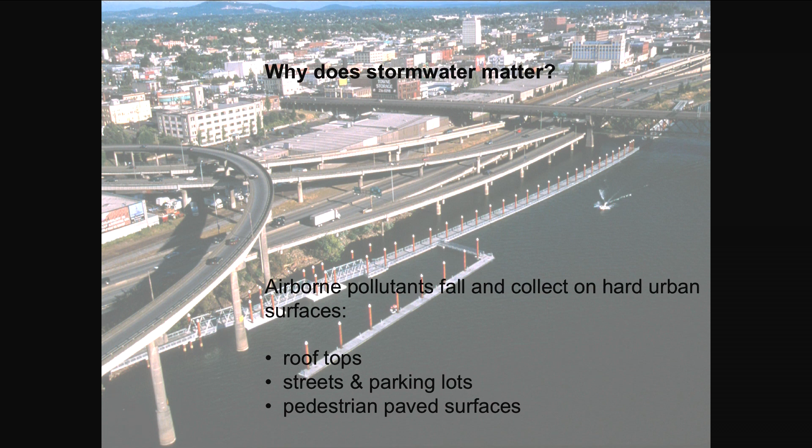One person mentioned that airborne pollutants that fall on surfaces, maybe roofs are cleaner than streets. That's definitely true, but I contend that airborne pollutants fall on all urban surfaces, rooftops, streets, parking lots, paved surfaces. And actually, a good example is look at your car. If you go away for 2 weeks, you washed it before you left, you come back, it hasn't rained, and it's covered with sticky stuff and things that have fallen out of the air.

Some places are more dirty than others from the air quality. You'll see from this example, this isn't the picture postcard for Portland, Oregon, but it is Portland. And freeways and all the rubber and all the airborne pollutants that come off fall onto rooftops in these urban areas. So we don't take those rooftops for granted. We feel like those need to be treated as well.

And I want you to just make a mental note. This is a project I'm going to show you a little bit later on, and you won't see the context of it next to the freeway in my photographs, but just remember that's what's there. So when I teach stormwater classes, I always remind everybody of the principal contaminants that we have, none of which are particularly pleasant to deal with. Some are in greater quantities than others.

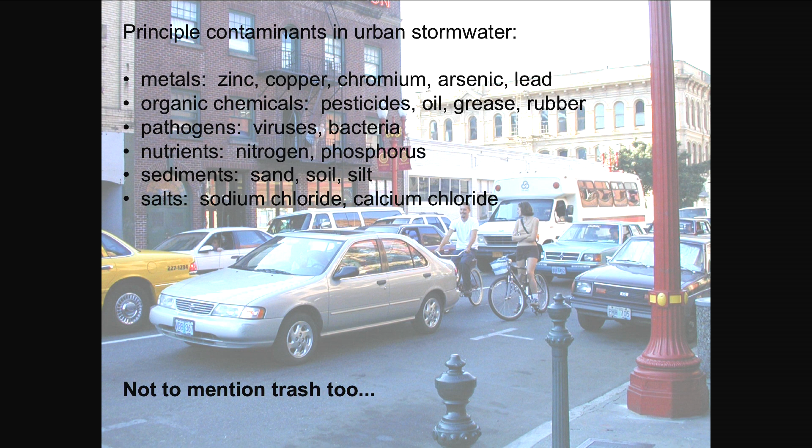And not to mention trash, too, because when I talk to students, I say, you'll never look at a catch basin in the same way after I'm done with you. You will never walk past one, and you'll see those pools of oil and the pretty colors, and you'll see the sediments, and you'll see all the junk that goes into our rivers, and most of it is untreated.

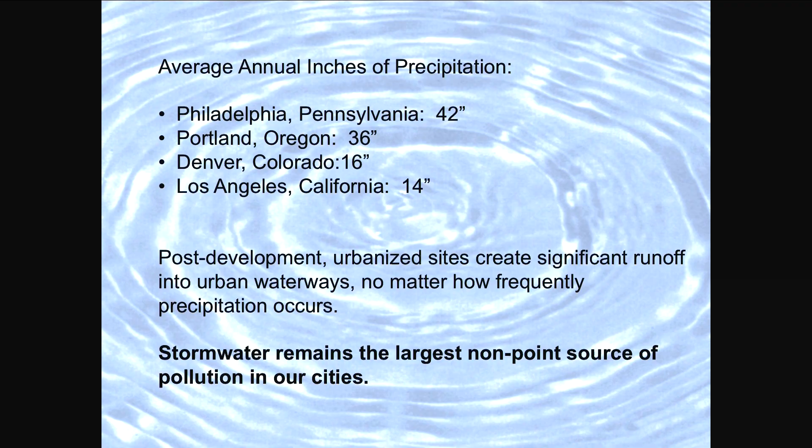And then coming from Portland, people always say, well, yeah, no wonder you have so much stormwater out there. You've got so much rain. Well, in fact, maybe we don't have as much rain as someone might think. Maybe Philadelphia has more. I got it off the internet, so it must be true. But we also know that Denver and Los Angeles have far less rain than Portland, but I say, are your streets any cleaner than ours? Yours just don't wash off as often. You're not as reminded of water as we are in Portland, Oregon.

So yeah, we were a little more proactive at getting there in terms of dealing with it. And we have endangered species of fish in our rivers. So we're taking this all very seriously. And stormwater does remain the largest non-point source of pollution in our cities, according to the EPA.

So as a firm, we've always looked at how can we best integrate the science and art of stormwater design, and how can we apply artful stormwater to a variety of projects. I'm going to go through these really quickly because there's a whole host of projects coming up, not just a few, and try to imagine the different circumstances under which we're working on behalf of stormwater, both storage and delay of the water post-storm, and also the water quality.

Were we calling them bioswales in '96? I guess we were. Yeah. Okay. Yeah.

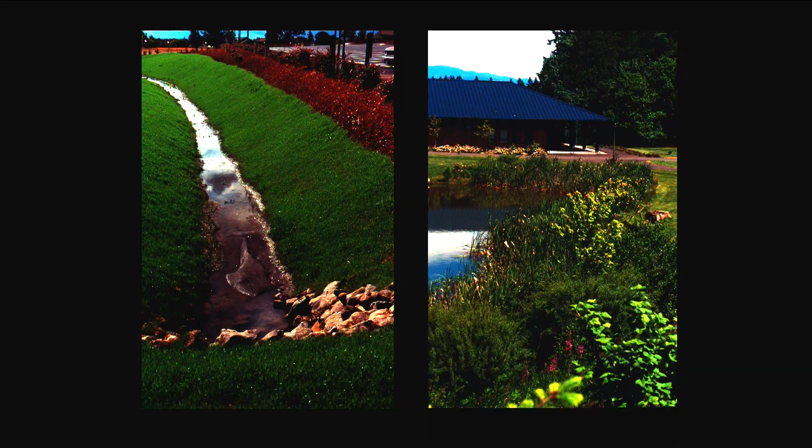And the first thing we did was, I believe we called it a grassy swale. And I remember standing out there after it was done, and the former farmer who owned the site was there, and the civil engineer, and the owner, and the maintenance people, and we looked at it. He goes, "That's nothing but a damn farmer's ditch." And I said, "Well, actually, you're right, it is. But look what it's doing. It's really capturing that sediment."

And now this is overgrown with lots more vegetation, as you can imagine. But it was, excuse the pun, a watershed moment for all of us to realize that this technology is not new. And farmers have done these sorts of things for years. And then this is an example of putting that wet pond right in the middle of campus where everybody sees it, where it gets good maintenance and it gets a lot of attention from students, particularly the biology students.

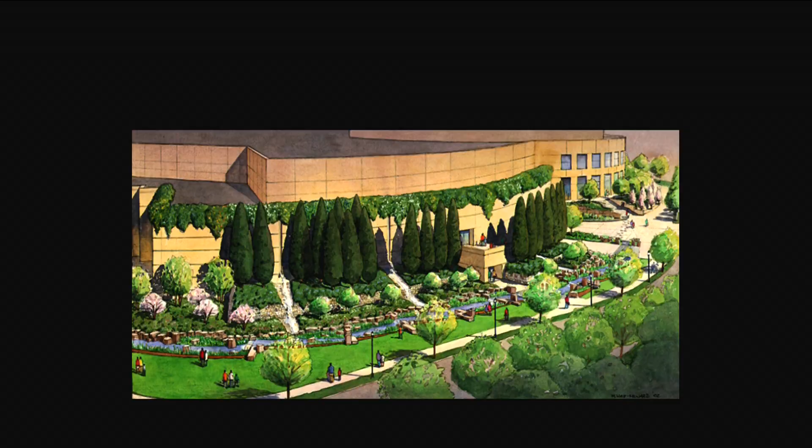So from there, we started learning more about getting other commissions in terms of beginning to develop larger visions for what stormwater can do. And this is the Oregon Convention Center. This was early on our idea that you could put an ordinary landscape in here, an ornamental landscape that would be quite lovely and might get it through the design commission, but that we had a bigger opportunity here to really create a vision for treating 5.5 acres of stormwater.

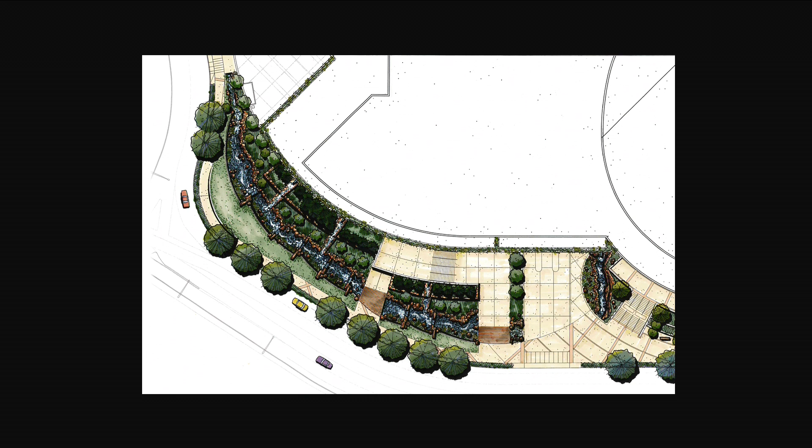So this is the building, this is the expansion, and there's actually 5 different watersheds that work off of this building, and some have to come a long way around. And then they enter a series of ponds down through here. So here's a little rendering. There's an area where they start coming out here, and then there's 9 ponds that work down. There's several different places where the water enters the system. And feeling like the regional plants and the regional stone, the beautiful basalt that we have, could really be featured in a place that visitors and residents come to alike.

So this was the largest rain garden that we had done, sort of the biggest disconnect your downspouts project that we'd ever attempted to do. And I think for the most part, it's gotten a lot of good critique. It's been published a lot. A lot of students come and want to know about it. We take tours of it all the time.

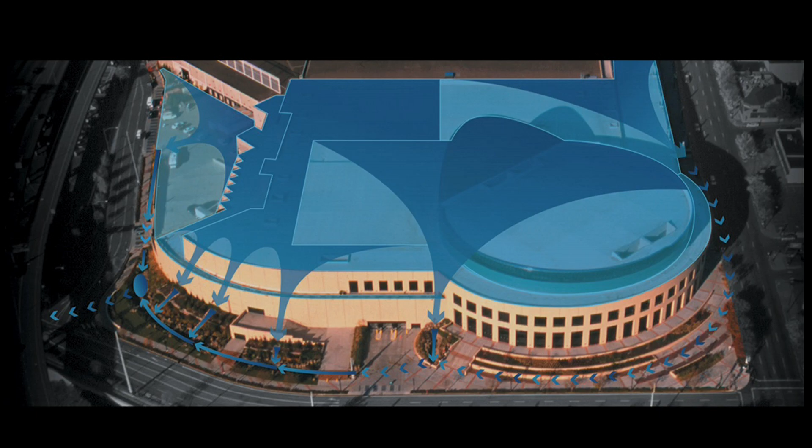And our first notion was to run that water away from the building first, because we didn't want any flooded basements. We didn't have any notion that subterranean parking garages would be filled with our stormwater. So we were pretty careful about what we did. But the architects were great about featuring scuppers, and the stonemasons were wonderful, and you can see the kind of regional representation that people can learn about the Northwest when they come to a place like this.

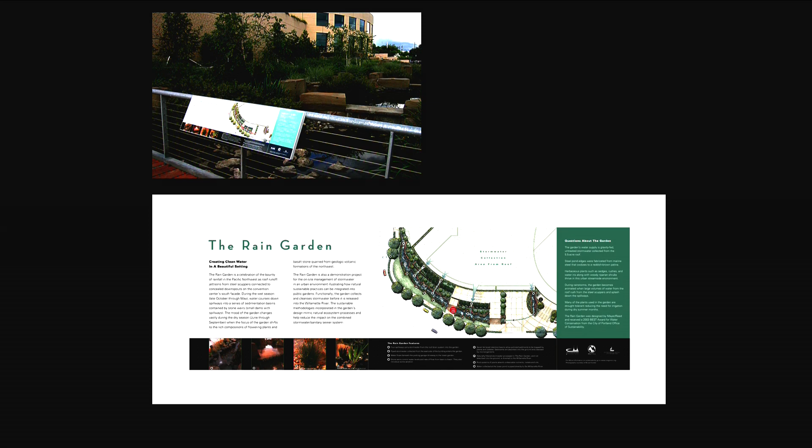And almost all of the water infiltrates into the subgrade through these settling ponds, and we really find some of the compositions quite lovely, and there's even more vegetation now in there than there was when we started. And then the interpretive part of it we think is really important so that people learn from this. It's visible, they can see it, but they need to learn. I'm going to move quickly here.

We've got a couple more projects that are in an area called the South Waterfront District of Portland, and there's 2 towers. One's 250 feet on a podium building, and one's 325 next to 2 podium buildings. And again, the Willamette River is running right here. So this whole district is sort of like Vancouver, BC Point Towers, if you've been there before.

Very urban, very tight. How are you going to deal with the stormwater? How are you going to treat that water? And how do you make it visible and appreciated by residents? So people living in these mixed-use towers can actually look down and see or walk by on the street the stormwater at work. And some of it's expressed down at the street level.

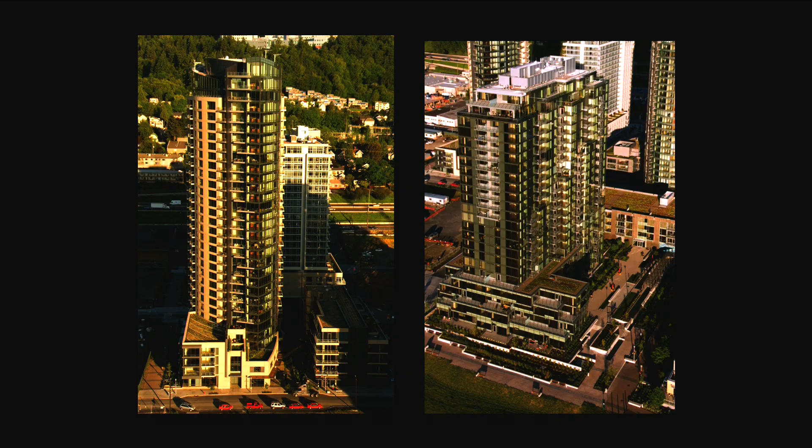Some of it's working through a series of green roofs on these podium areas right here. So you don't even need a lot of space all the time. Some of these tight sites are even more fun and more challenging. And there's a stormwater swale all the way along this edge.

That's this. And then for people who love water in the summer, which we really don't have, oddly enough, we have about 3 months without water. The residents were anxious to see some kind of a recirculating water feature. So we have them separated as systems, but we appreciate both, and they're handled in a design sense quite differently. And this is out in front of some townhomes.

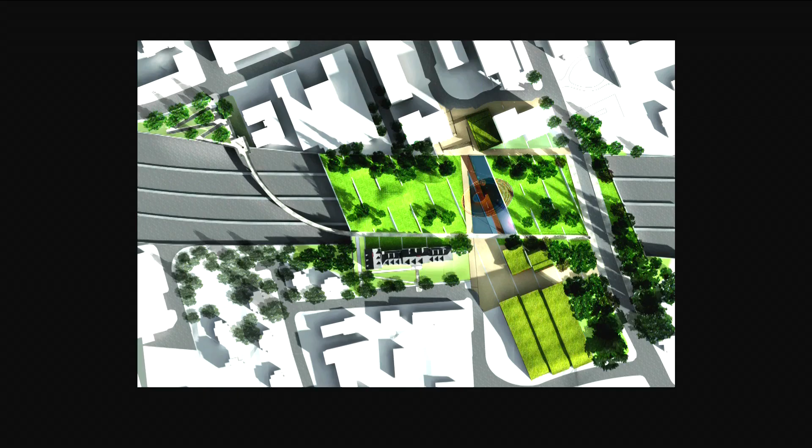And this is pumped groundwater coming up so the building doesn't turn over when the subterranean water rises. So anyway, there's ways to treat that water as well. I'm going to move through this one very quickly. It was a project that we worked on with Sue Weiler in the room, and a very large green roof cap over a freeway proposal that we worked on several years ago.

And this one, I guess I'll just say in terms of the goals of dealing with traffic, dealing with enticing people to ride more bikes and walk, looking at precedents such as this one in Salt Lake of Olin's work at the LDS Church, bringing these things together and creating a large cap over a freeway was a really interesting design challenge. And putting a piece of art up in the air was pretty exciting too.

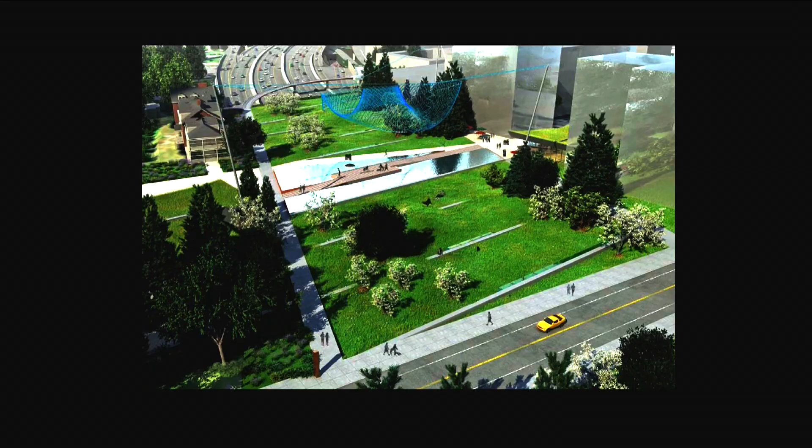So this one is not built, nor will it be. But anyway, it was really a great time to start to integrate these ideas of meadow and ideas of thinner landscape spread out over a cap and a lid over a freeway to really join the downtown of Vancouver, Washington to this park that's across the street.

One thing about working at an airport, if you ever get the chance, is the last thing they want is anything flying in the air besides airplanes. They don't want geese, they don't want hawks, they don't want great blue heron, they don't want any of our favorites, and they really dread starlings and birds like that that form big colonies. They call them bird strikes, and you don't want to be in an airplane when there's one going on. So some of the plants that you use to attract wildlife were not things that we used here. The way that you would design a planting plan to attract wildlife has not been used here. And we couldn't use any stormwater treatment that was touching the ground, creating ponds.

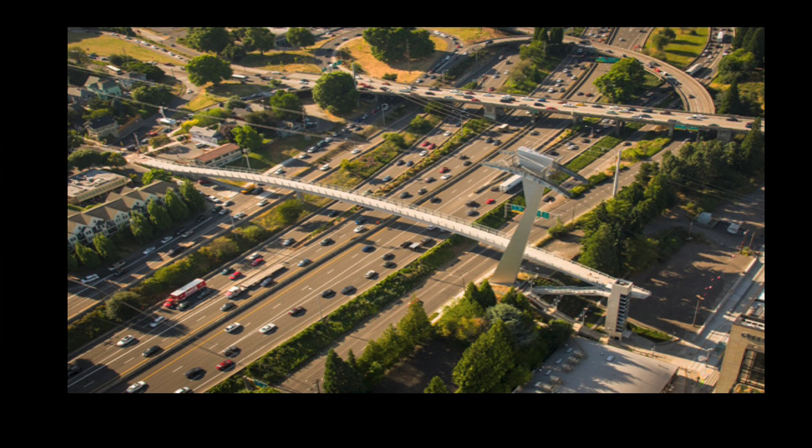And one of our jobs was to take the amount of stormwater that starts about here and comes off of this deck, which isn't particularly clean because you can see what's going on here. All the particulate from the freeway is rising up off the surface and landing on places like this. So it's pretty dirty water. And when the bridge comes across, and this is just a pedestrian bridge, it's still 60 feet in the air because they couldn't curve the bridge large enough or arch it far enough to be able to meet grades.

So one of our jobs was to design a stairway down and work with them on an elevator tower, but also to design a landscape that's very small and is probably one of the most constrained, difficult sites we've ever worked on. And you can see from this closer, there's one of the cabs of the aerial tram. When you come across and you come down the stair, you start crossing a whole series of weirs that are tracing down the slope there.

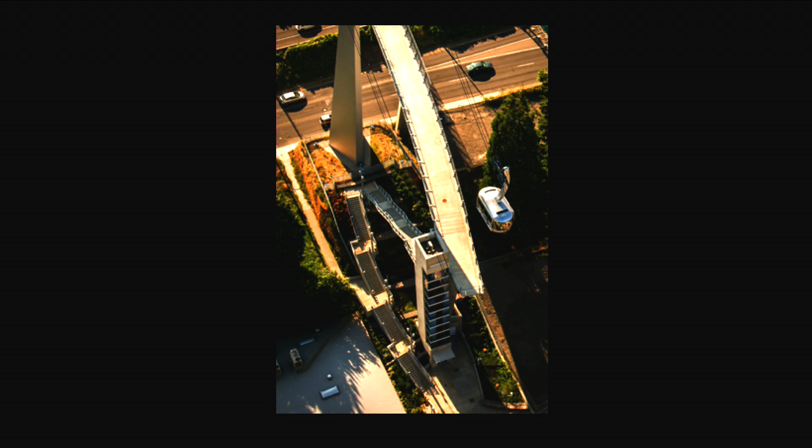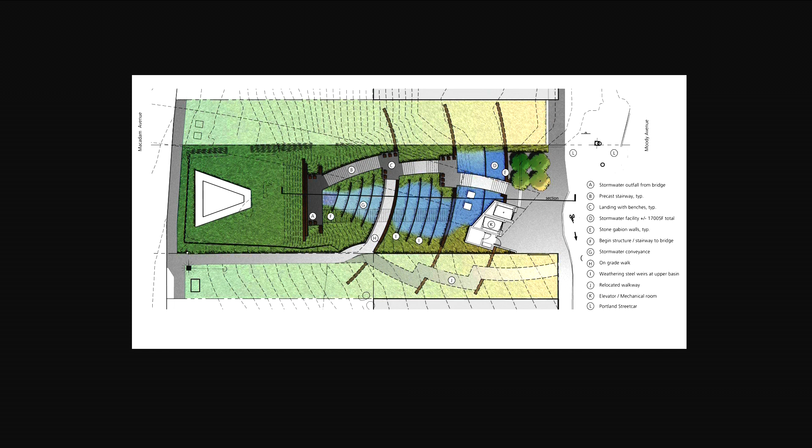But it's a really interesting way to experience the water, and it really has a lot of visibility when it runs. It moves through the system fairly fast. There's not a lot of retention, but it's really kind of a fun project.

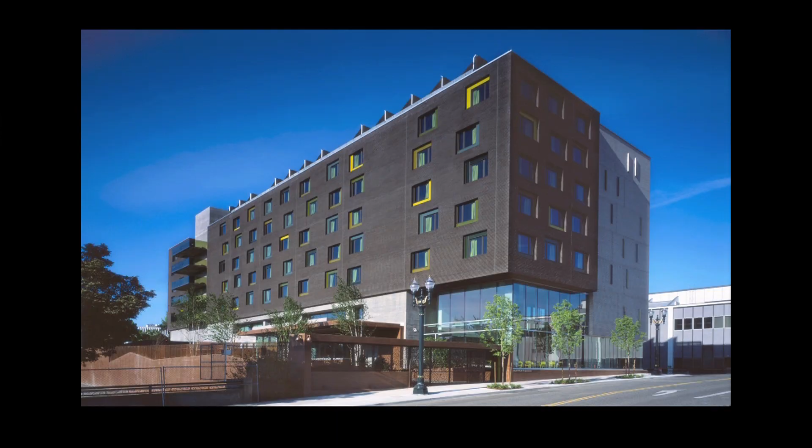And then lastly, the Bud Clark Commons is a new building in downtown Portland right near the train station, a transit mall, that is built for three purposes: to provide day services to the homeless, and then there's a men's shelter where homeless men can come and live for 90 days while they're looking for work. They have to be clean and sober. The ones walking into the day center, you can imagine, are in all kinds of states of mind and states of physicality. And then in the top area, they rent out single studios to very low-income people or no-income people.

So they might need to make a phone call, they might need a shower, they might need to develop a resume, they might need a form of ID. You can imagine all the kinds of misfortunes that have come upon people who are coming to this facility to try to make a change in their life.

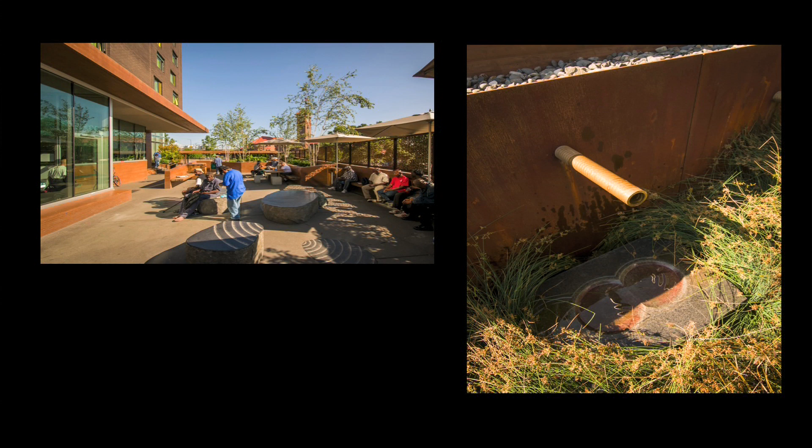And then I just wanted to show you this, that we worked carefully with an artist that does stonework that developed these splash blocks for a series of pipes that release the water into the planter. So this gives you an idea of what kinds of facilities you can put out there, an attempt to give some dignity and respect to people who really are trying to make a change in their lives.

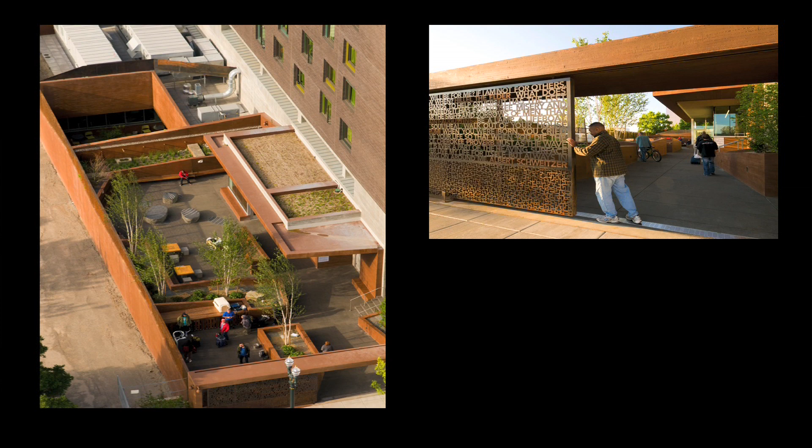And also, I was asking Steve earlier about the acoustic qualities of the space that he designed at 10th and Hoyt. And it's really interesting to introduce that in there because from a seasonal standpoint, you're getting this play of water into these small private spaces, and it's really quite an effective tool. And it's had a calming influence. The people who work there said the group sort of comes in and they don't fight, they don't have as many conflicts as they otherwise might. They seem to have a meditative atmosphere created for them, which is very helpful if you're trying to make a change from life on the street.